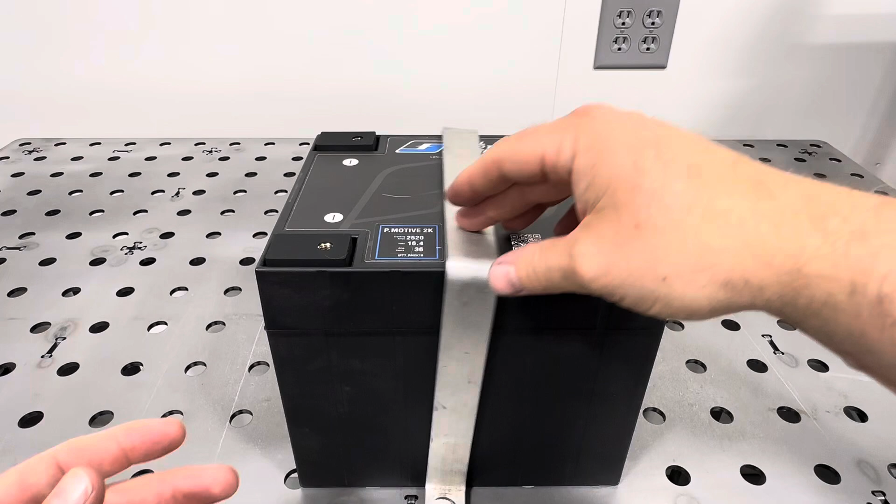And it went over a regular battery. It wasn't this battery, but it's almost like, I don't know if they ran out of time or they ran out of talent or what happened, but this is what was on it. And it's not great. As you can see, it's not really constraining the battery the best. It kind of holds it down-ish, I guess you could say, but we are going to make it better.

We're going to try something different. We're not going to reinvent the wheel, but we do want to get this securely mounted. And this is a lightweight battery, an expensive lightweight battery. We don't want some 5-pound hunk holding down a 15-pound battery. It's just not required, it's just not necessary. It's too much. Nobody wants to spend all this money on a nice, good performing battery and then throw a bunch of extra weight on it when you've spent the money to save some weight.

So we'll try and make it as slim as possible and have some extra features on it that we think will make people's lives easier. And if it goes well, we'll go ahead and sell it.

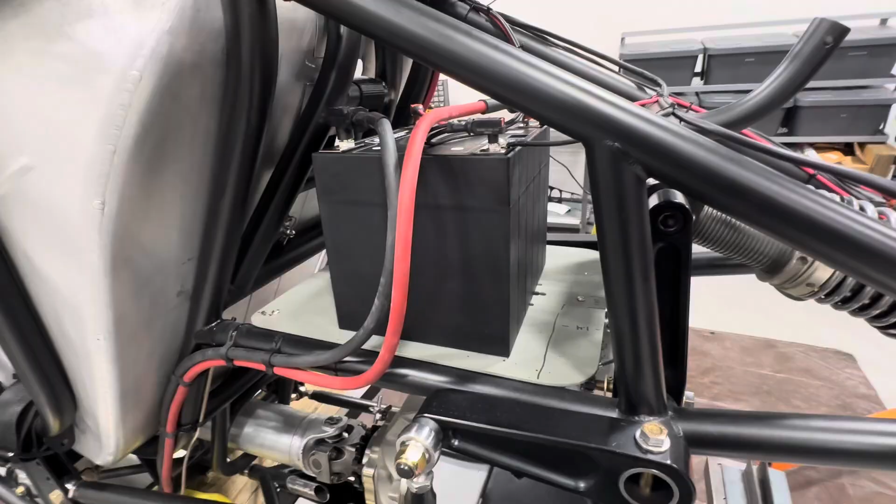Here's the setup we were talking about, and this is after we wired it in. You can see that this is sitting behind the seat and above the rear end. So it's got a cantilever shock system, right in front of the shocks. So we have this much room to work with.

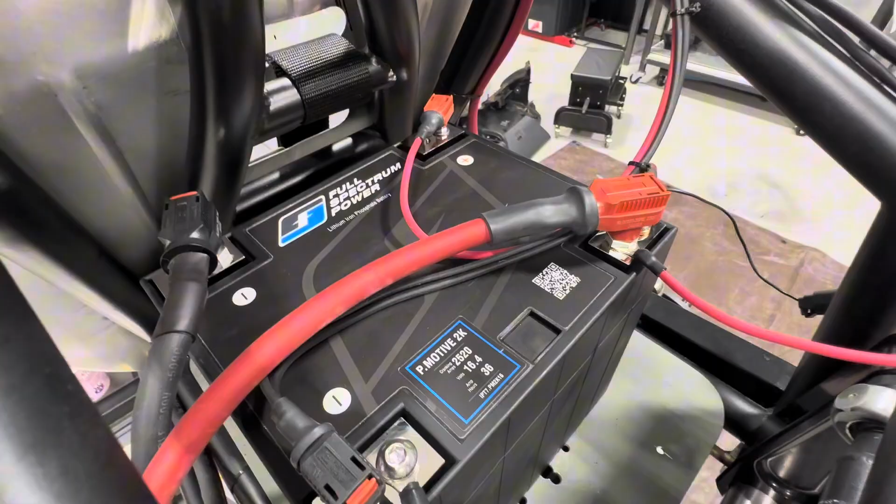It fits, but we have it in here wired up. Of course, nothing's really tied up or tidy. You can see the battery cables going down to the starter, hooked up with Radloks. Check out that video we've got on the details of the Radloks. Those are two gauge wires here, cables.

And then this is some grounds for the ECU, power for the ECU. And then we have a couple other little things for a charger lug that's hooked up to the back. So a charging port is right there.

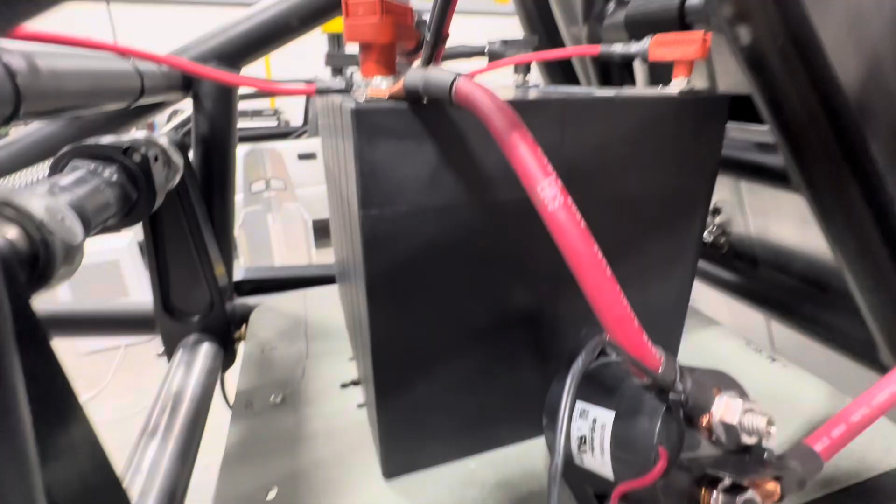One thing that we've got going on is a contactor for the disconnect, and it's just kind of floating right there. One of the requirements I want is to be able to have some method to mount the contactor on the side of the battery mount in order to give it a place to land. So we have space for that over on the side, even if it's sticking out.

And then this will feed up to the relay panel. Thing I'd like to have on the battery mount is to have some sort of details on there to fasten down cabling. I'm not really sure what that looks like at the moment, but I'd like to add some features to it to hold down cabling once things are in place.

All right, so now that we've got the battery in the location where we want it, we have it rough wired in. We've got the cables going where we want them. It's time to define exactly how we want this to be. A couple of requirements: we want it to be lightweight, we want it to be minimalist.

One thing that's been on my mind is, is there really a need to have a full plate on the bottom? If it's elevated slightly and it's captured on the corners, is that enough? I'm thinking so. I'm going to explore that option, see what I can come up with.

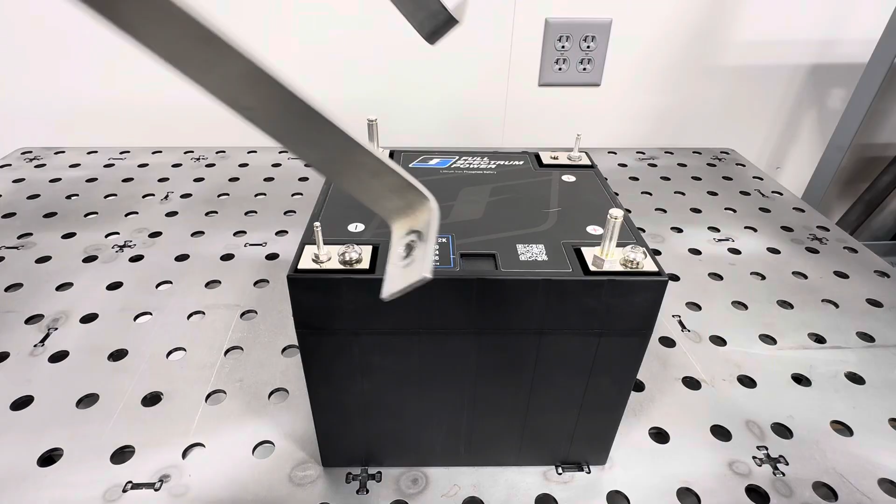It's got to not be this. We talked about this early on, about restraining something, about 6 degrees of freedom, meaning we want something fixed so it doesn't move back and forth, left or right, up or down, or twist in any form or fashion in 3 axes. So you've got 6 ways you need to make sure this is pinned down. Most do a very good job at that.

Some are a little bit heavier than I would like. Again, this is a lightweight battery, an expensive battery. We don't want to have it any heavier than possible, so keep it minimalist.

The other thing we talked about is having some way to manage the cables, whether that be having a place to zip tie them, hold them off, whatever. Just something a little better than what we normally see on a battery hold down.

And I think we can come up with something that will be a little better than what's out there right now on the market. We do have the CAD for this case. We'll start by putting that in and just start building some pieces and see if we can come up with something decent.

Okay, we were lucky enough to get the CAD model here for the 2K case. That definitely helps us out in our design work so we have an accurate model to work with.

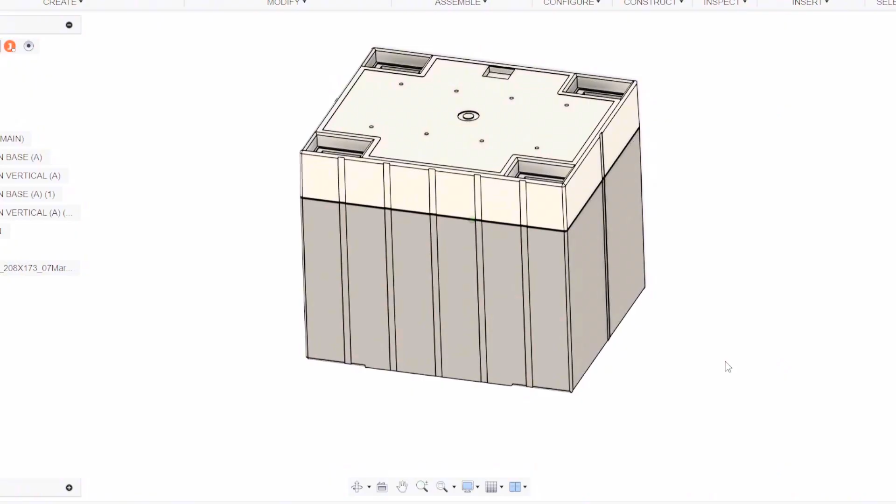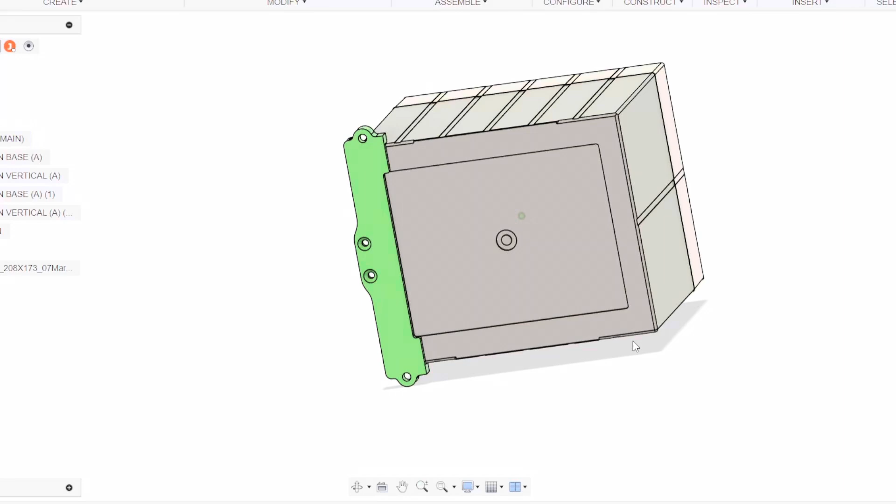One thing I want to point out about this case is that the perimeter sticks up more than the center. So if there was a full plate on the bottom, really only the perimeter would be touching. So I thought, well, if we're going to split the base and have two different portions, then we can just seat it up here, and you can notice it just follows that high spot around the perimeter of the case. So we did give it some thickness here.

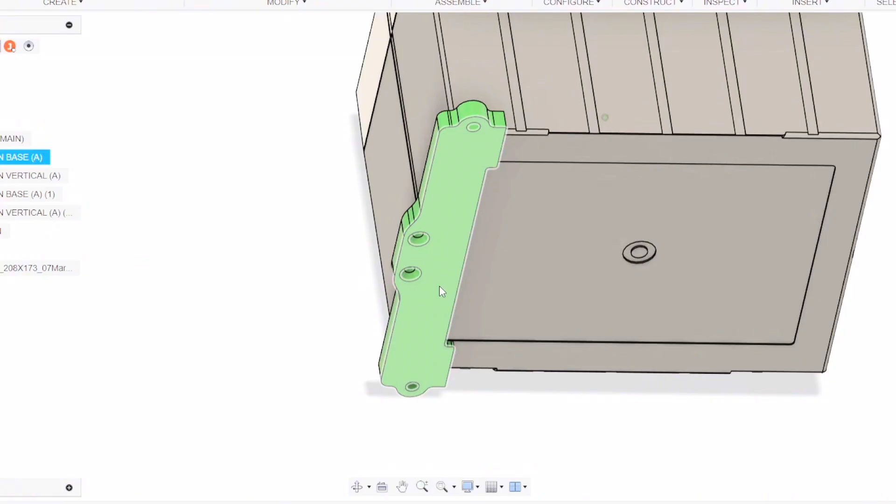You can see how the case sits down inside of a pocket on the corner, kind of capturing the corner, keeping it from moving left or right, forward or back. And we gave it some depth because on the bottom it's going to have to sit flush, so there's a countersink screw there. Of course, if you had a regular bolt there, it would be sitting up on the bolt. So we gave it some thickness for two reasons: for both the countersink and to capture the corners.

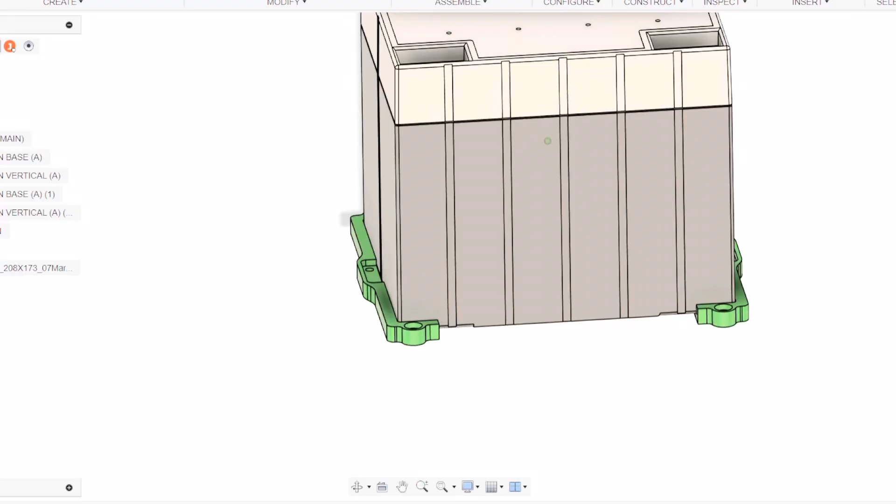And then we'll have four places to bolt it down. Of course, it'll look just like a mirrored image on the other side. Okay, so once that gets bolted down and assembled, you have four points to mount from.

One thing I was going to mention was that we do have a pretty tight corner here, meaning that the case does have a radius on it, but that's pretty tight. So when you're machining something, your tool is obviously round, so you have to use a really small diameter to get in there and pocket that out. Talked to John about that. He works magic, so he'll be able to get that machined out.

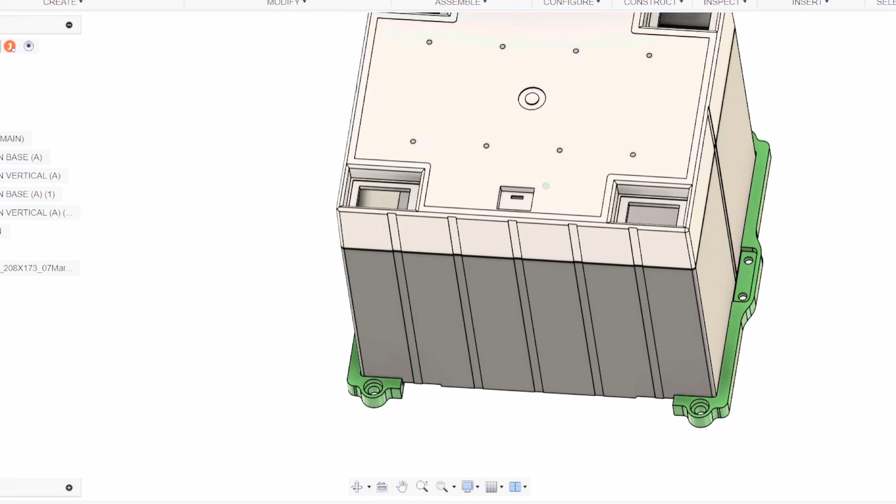And then, of course, to be able to mount it, we went ahead and put a vertical portion on it, and that'll be on both sides. So this spacing here is going to be the same spacing that we put on the top. We did pocket this out some. And then, of course, the bolt down on top.

So we have the holes here on the side and on the top, and that's going to be what allows us to fasten some cable management down. So we kept it very simple.

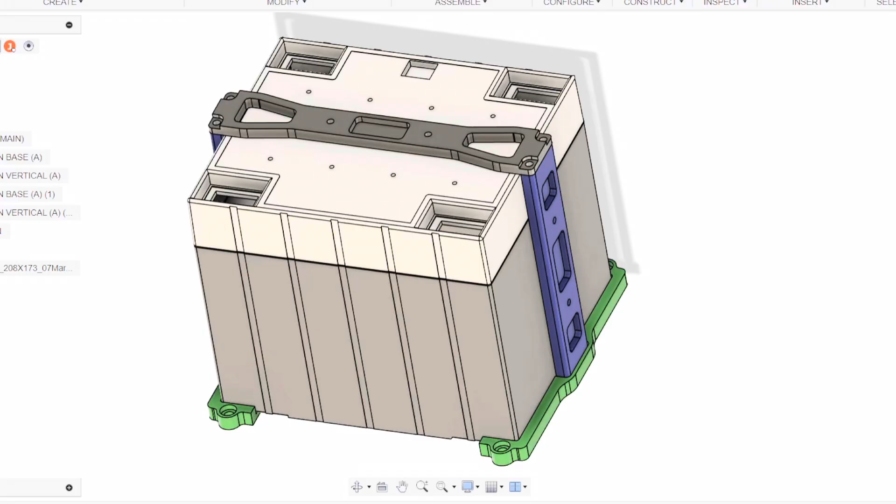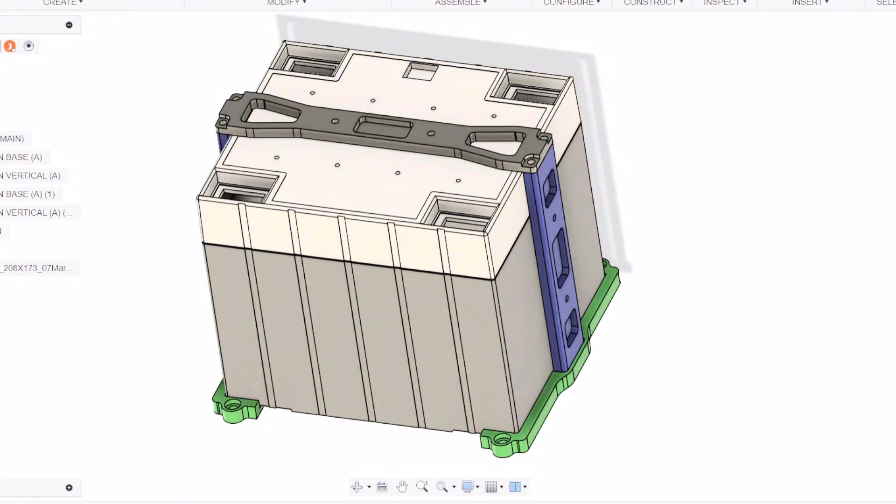Thought about a couple things, adding them in, but because this is a very generic battery, meaning that you can use it in any application, it's not just for a certain type of car that will always be wired the same way. This allowed us to keep it simple and give a few options for things to bolt down, and then we'll go ahead and design some things for cable management that can fasten to those.

My thought has always been to make it as simple as possible in the design. Work is not done until it's as simple as possible, but yet still works. So I didn't want to constrain the use of the mount to just certain applications, but keep it more generic and flexible for the thousands of different applications that this exact battery will go into.

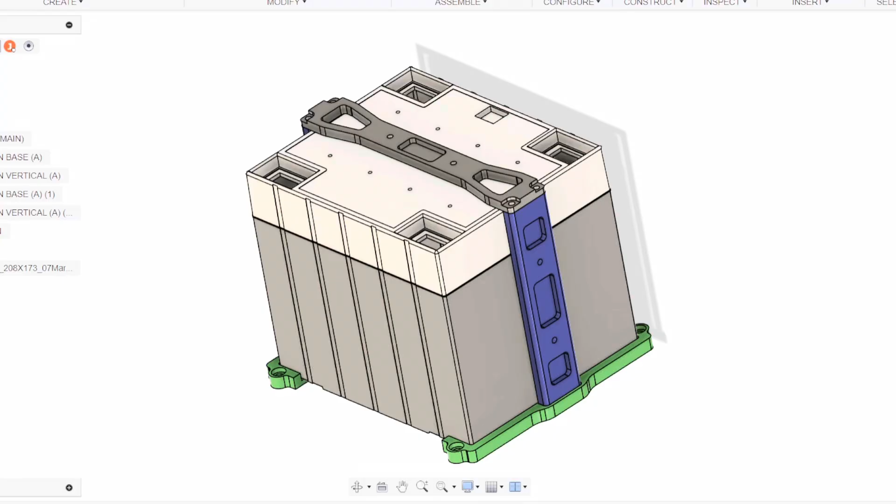Overall, I would say that this should work out pretty well. I think it's time to go ahead and 3D print it and assemble it onto the battery and see how it fits.

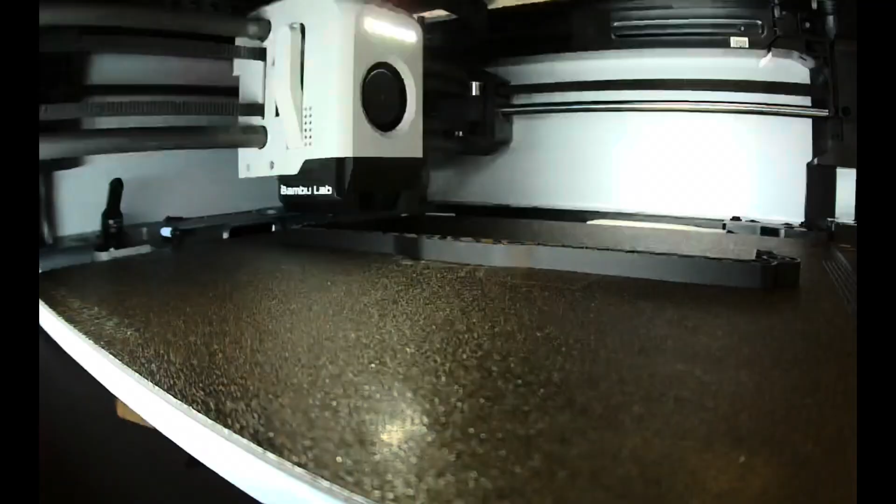All right, these parts are 3D printed. They've got some carbon infused in them, so somewhat strong, but of course we will machine these out of aluminum when we have our design sorted out completely. So it's a 5-piece design. We've got the two base pieces that should capture the bottom verticals and the top tie down. So let's go ahead and put this together.

Seems to fit pretty good. This print seems to be pretty accurate and fits pretty good. We have pockets in here.

And like we said, we wanted to be able to bolt this to the side of it. So the spacing on these is the same as these bolt holes, and most of them on the market have that same spacing. So we're able to screw that in directly on the side. And then we're on the top. There's some common hold downs out there that we'll probably use.

Let me grab one of those and put that on. Something like these, you can find these out there just about anywhere. Just a cable tie mount, and we'll tighten that down with a 10-24, and that'll allow us to zip tie some things up. Once the hold down assembly is put together and assembled onto the battery, then we can go ahead and pin it down.

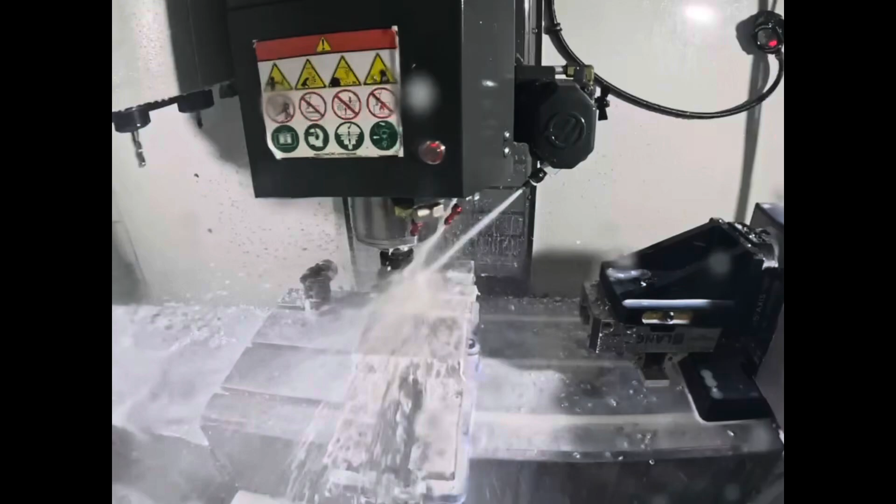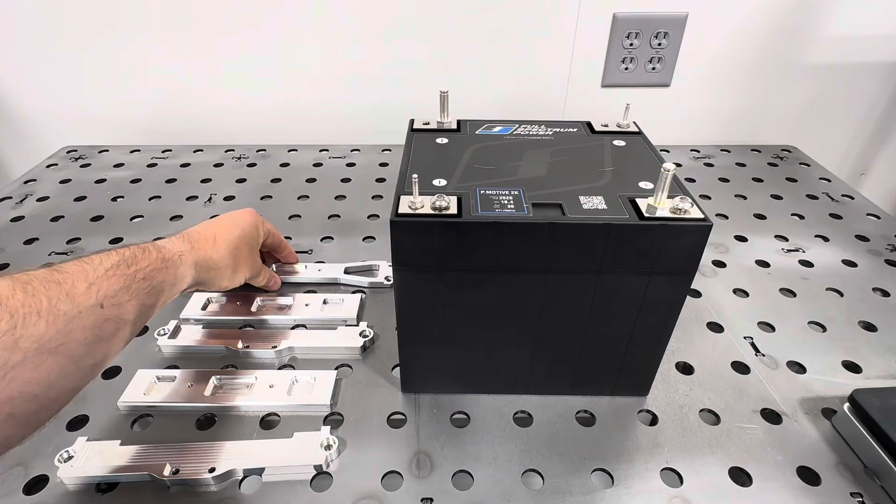All right, parts are machined, turned out great. Got two of the base piece, then two of the vertical riser, and then the top clamp down. One thing I wanted, as I noted before, is I wanted to be around a pound or less. So I guess it's time to see how well we did. I thought it'd be pretty close. You can get an estimate from your CAD, but you never really know until it's off the machine. So there.

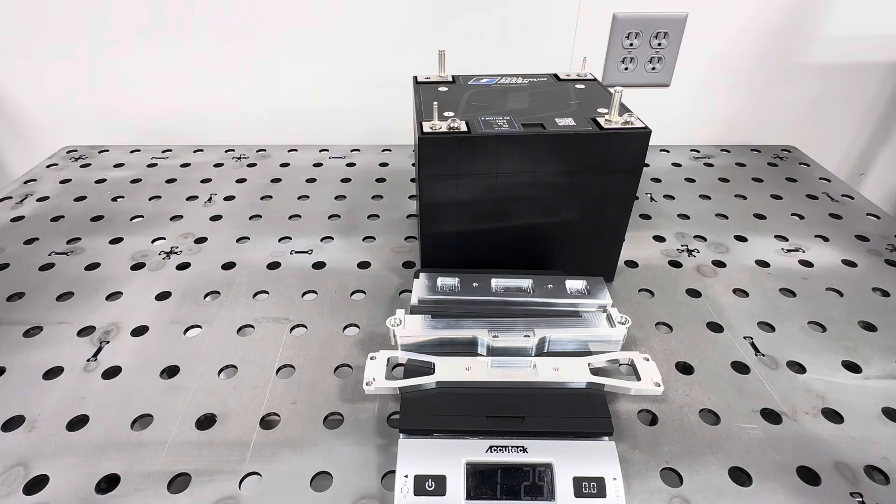All right, looks like we are a couple ounces heavy here. Plus there'll be a few fasteners, so may have to put this on a little bit of a diet for the final revision. Possibly pocket out these holes completely, do a few things. I have a few ideas where we can make it a little bit lighter, but not too bad. Really close to target, and we will have a few fasteners as well, so that will increase that. But not too bad. We're close and good enough to proceed and see how well it works and put it into practice.

All right, this seemed to have gone together pretty good. This is the point where we find out how rigid it's going to be with the 3D print. It was pretty flexible, at least the way I printed it, so this will tell us how rigid it's going to be, how well it's going to hold the battery down. Everything seems to fit in, the corner's good.

That's kind of a tight radius, so I was worried about that, but it seems to have come out really well. That's part of the reason I do like using the transfer punch when it's all assembled, because there could be some slight variances in exactly how this gets bolted together, but it really isn't that much. So the template works just fine as well.

But yeah, it's feeling pretty good. Battery doesn't seem to want to move as far as inside of that, it doesn't want to flex out. Especially once it's bolted down, it's definitely not going to go anywhere. I'm sure you can flex this out if you really try, but once it's bolted down, that essentially gives you a fixed platform, keeps it from moving left and right, up and down, wanting to twist or anything. So I think we're good as far as rigidity on the hold down.

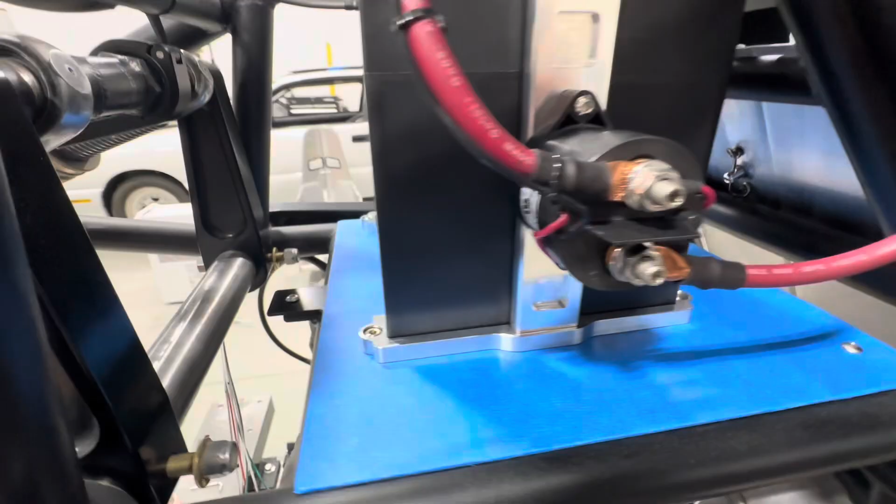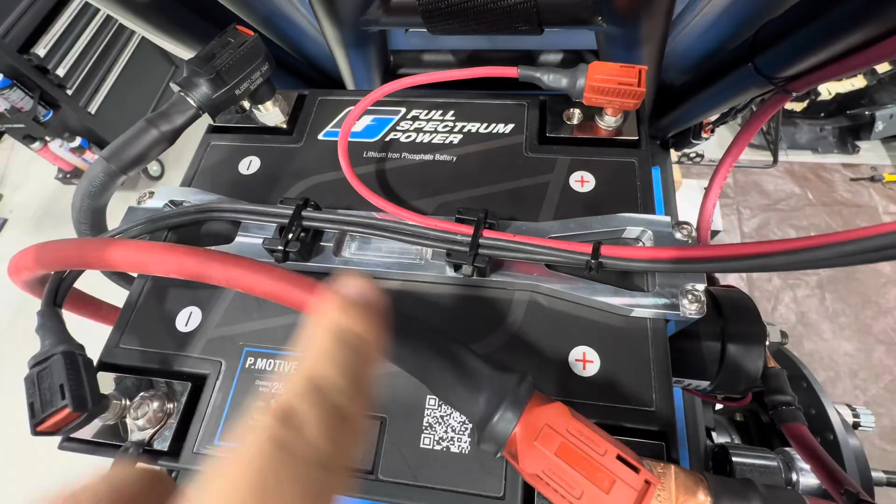You can see it's bolted down at the base there, 1/4 inch bolts, and then we've got the contactor wired up, mounted directly to the vertical post on the mount. Just simply put the two 10-24 screws in and you're ready to go. Coming up to the top here, these two holes, which is actually the same bolt spacing as the other one, so you can put the contactor on top if you want, but we just screwed down two of the simple cable tie downs and put zip ties around them. Holds it in place, gives you a nice place to feed through.

Over here, as you can see, these cables are still floating out there. I'm not super happy with that, but I do have these two holes here. So I made something.

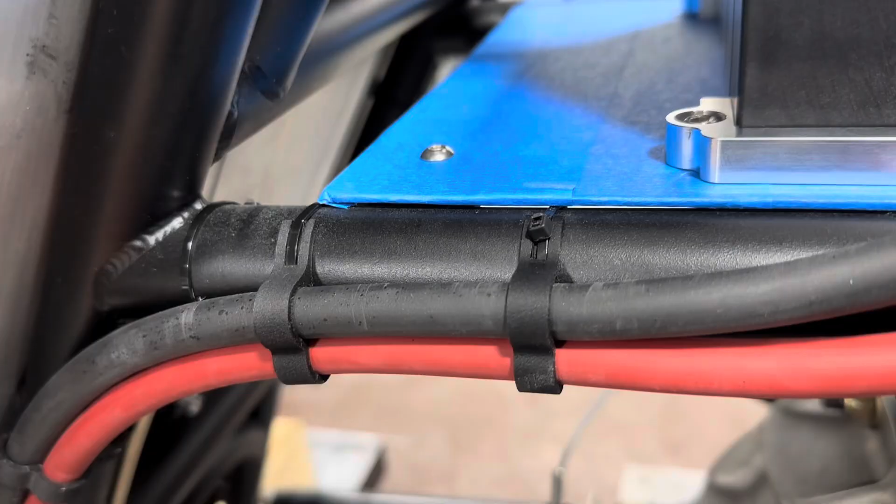I'll show you how I did that here in a second. Notice how we have these cable ties for round tubes that we made. I like this because oftentimes if you wrap a zip tie all the way around, you kind of have these gaps down in the corners. This is actually sized to the cable, and then a zip tie goes underneath the cable and stays around the tube, keeping the zip tie in a round fashion instead of going all the way over the cables, and it captures it right here.

So this is something we've been using a lot, these cable tie downs for capturing. These little widgets we've been using a lot for round tube. Makes life easy just with zip ties to put it on, but yet works a little better in my opinion.

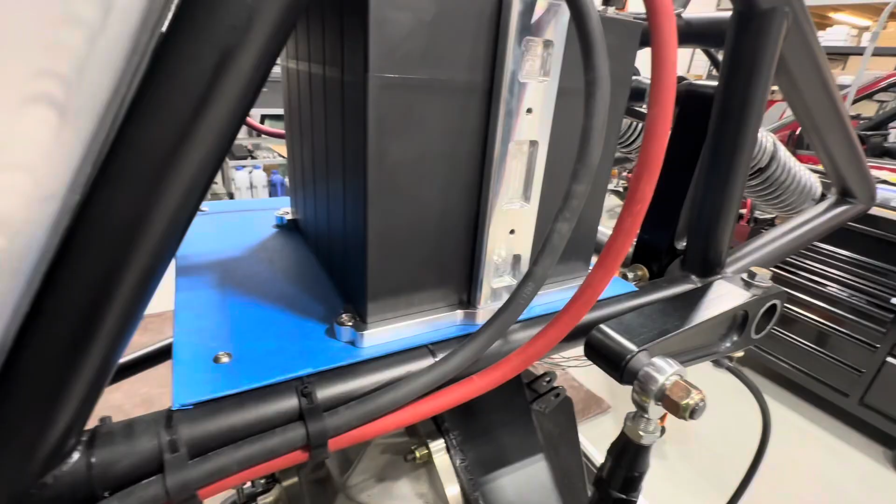I made something similar for the battery mount. Notice it stands off a ways. So we took a couple measurements and allowed this to come off further. We'll show you that.

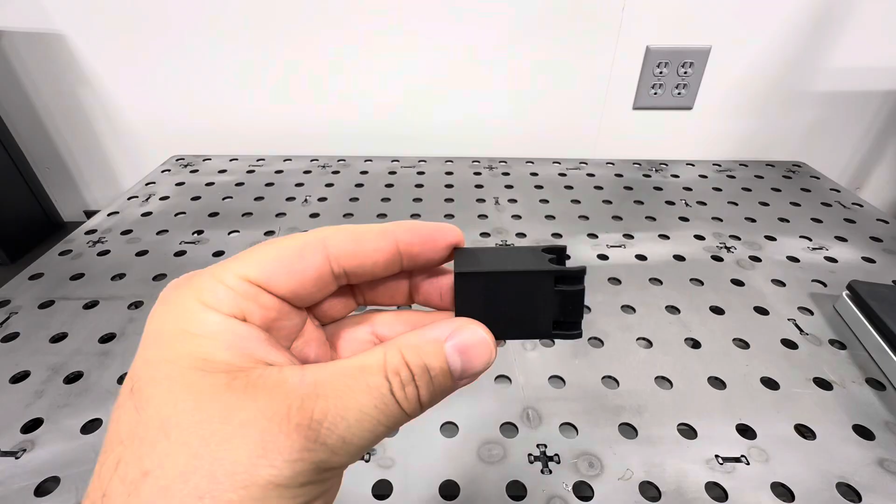We'll use this to tie off those 2-gauge cables. Notice this is relatively long, but that's how long it needed to be to space out to where that frame rail is. And notice it has a through hole, so you just slide that screw through. You can screw it into the battery hold down, and then the cables go in.

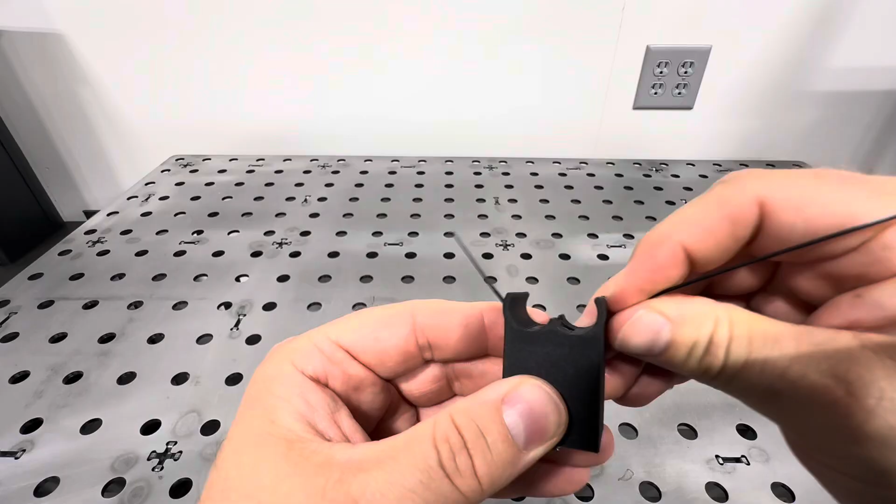What we like about these is that the zip tie goes through there. We've got actually 2 of them on there in this case, so you slide these through. Again, this is 3D printed. Probably not something you're going to machine, a feature like that inside of here, at least not in this fashion. So yeah, there you go.

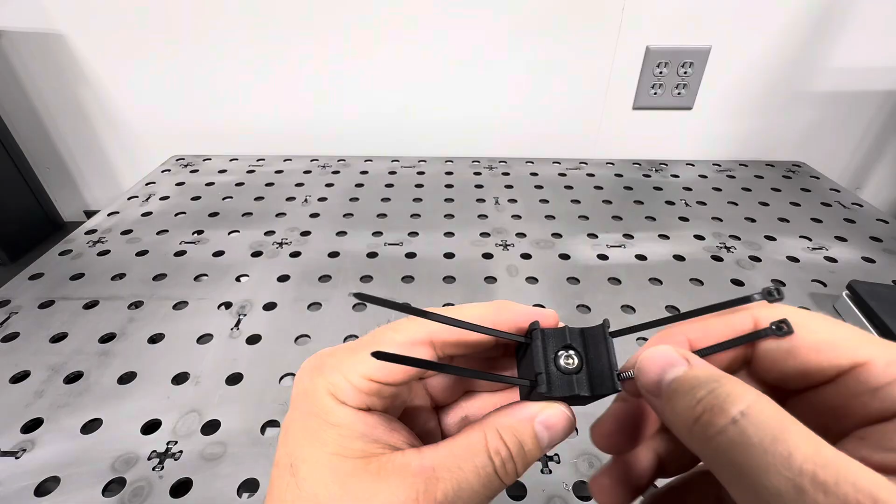We'll have a couple of these on there, and the battery cables will go through. We'll zip tie them down, and that should give us a tidy method to control those cables.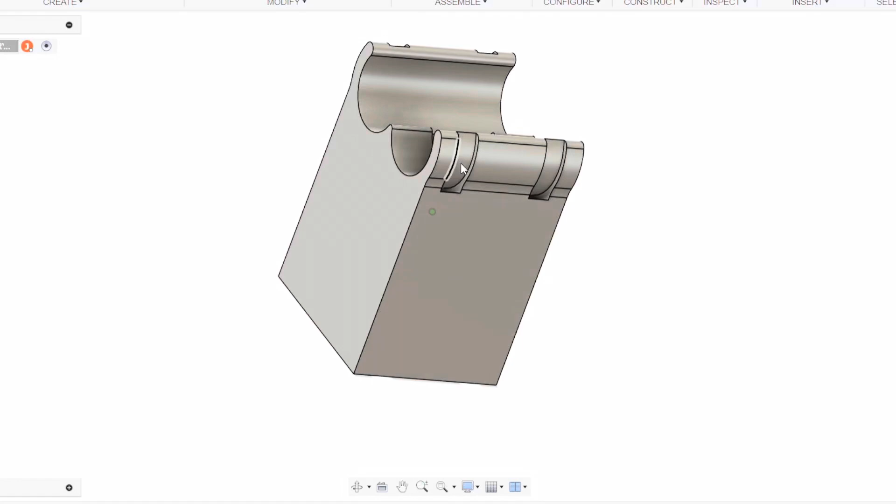Here's the model of that hold down for the 2-gauge cables. You can see it's got the through hole to screw it down, and it has 2 sections here to put the zip ties around. Sectioning that out, you can see that the zip tie just feeds all the way underneath. And that's all there is to it.

Here's a short version of that same thing that we used to stand off. Just wanted to show that. That would keep the cables nice and tight to the battery mount.

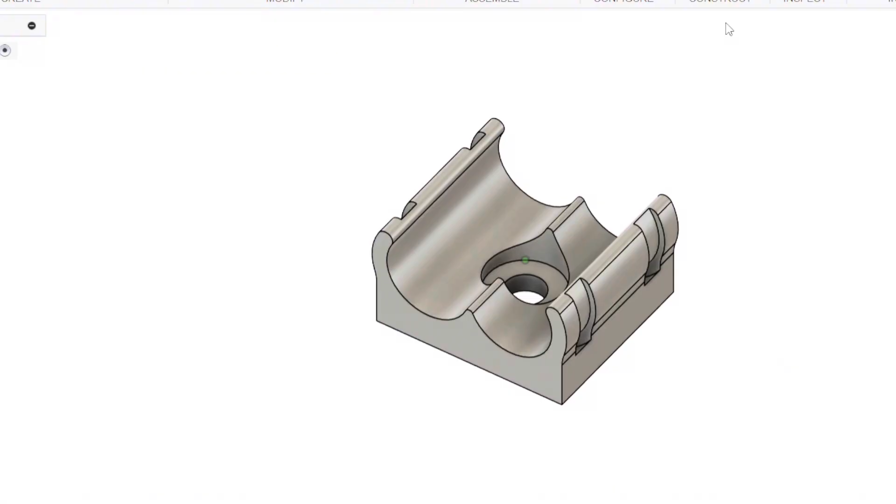Here's another option that would clamp them together but yet separate. Just a different way of accomplishing the same task, but they are going to be separate because you have the screw going through the center, so they won't be right next to each other.

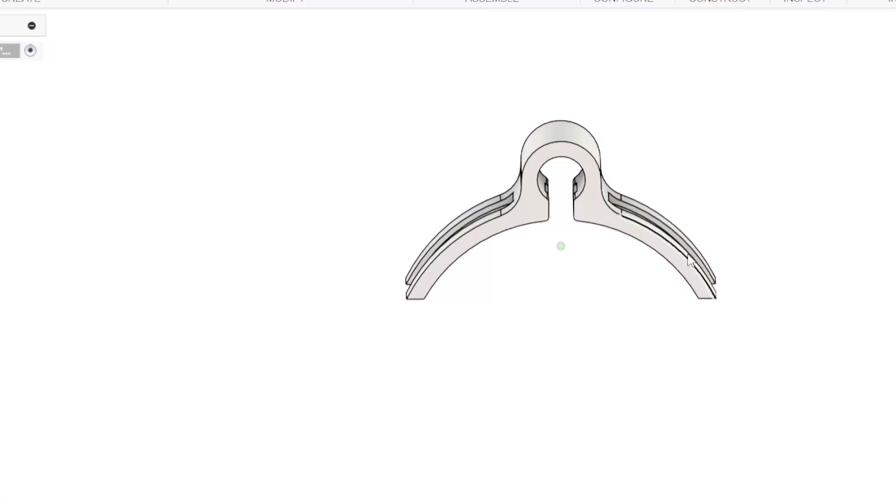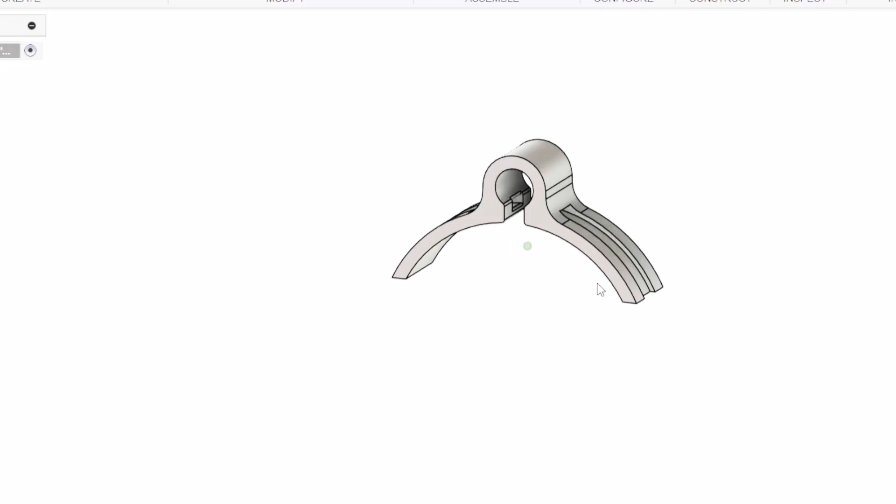Here is a brake line mount to the 2. This is off topic, but we were showing the cables mounted to the side. These are both the same type of thing. You can see how the zip tie will go through and underneath the cables, cross over and wrap around the tube. And it's the same principle with this single brake line. You could do that too. Anyways, just some ways to help manage cables, tubes, hoses, that sort of thing, that anybody can really set up something like this and print on their 3D printer.

That's what we did, and it works out great. Just use the right materials and whatnot to hold up to the application. Just wanted to show a few different things for cable management or hoses or brake lines.

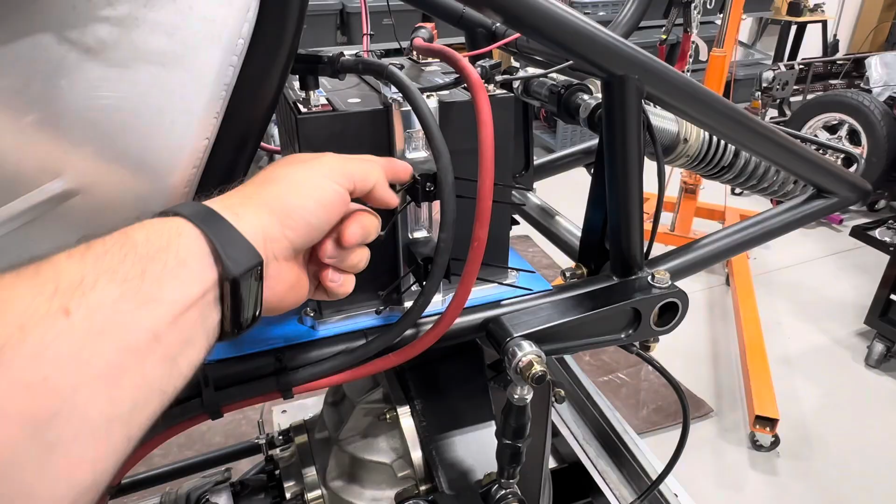So we've just screwed those parts into the side, and hopefully these will help take these unruly cables and get them straightened out a little bit. So we'll just push these into place. Should be pretty snug if everything is correct here. Yeah, it's almost like staying there without the zip ties just because of how snug it is, but there we go.

And I'm thinking maybe I'll just put these on the website so that people can download these. I mean, anybody could just design something similar depending on what size their cables are, just a million different options. So this would give people something to start with as far as a CAD model if they wanted to make something. Of course, everybody's application is going to be a little different, but...

Should work out pretty good. That just makes everything look a little more kosher. Trim those zip ties, and that should be good. You can see it from there. Just kind of helps make everything a little more smooth.

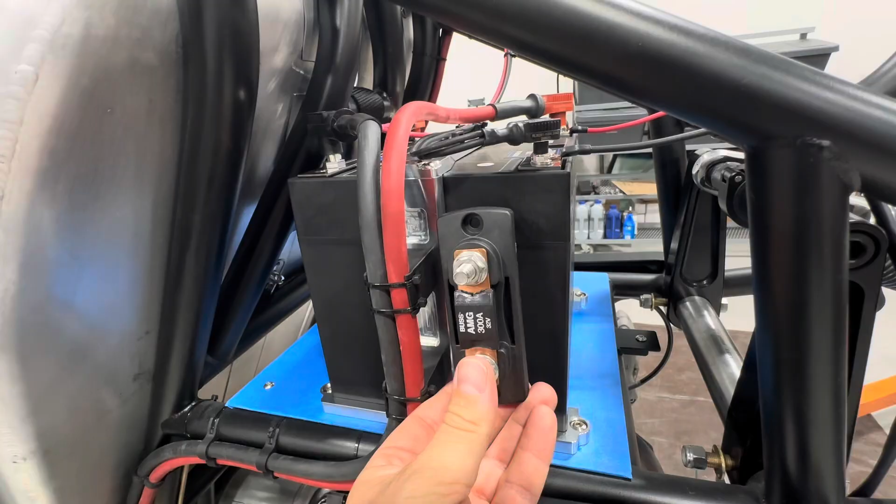You can match up the radius of your starter cable and ground, slipping them through that cable retainer. If those were removed, you could use these two holes with a simple plate, made of carbon fiber or aluminum. If you wanted a mega fuse mounted there, you could bolt it to the plate and run your cable through the fuse. It gives you options for a simple plate bolted there, just two screw holes, nothing overly complicated, but it really does give you a lot of different options for cable management around your battery.

So I think at this point, it's probably time to get these parts anodized and finish this project up.

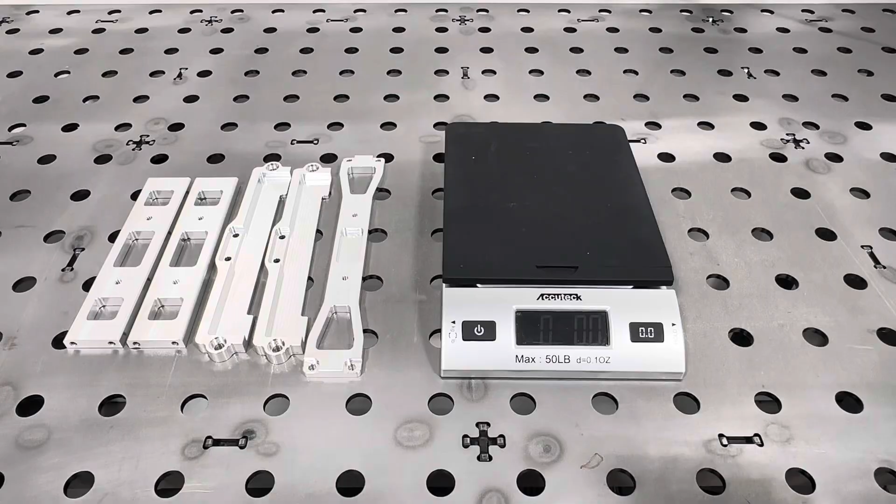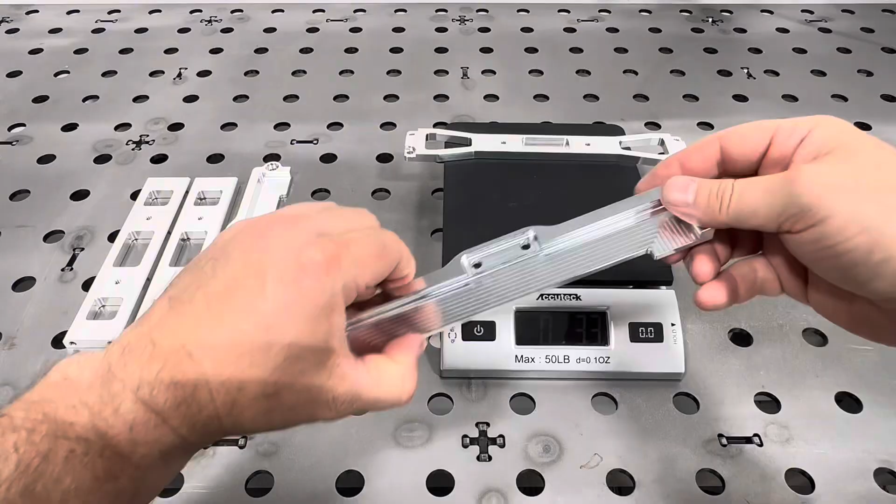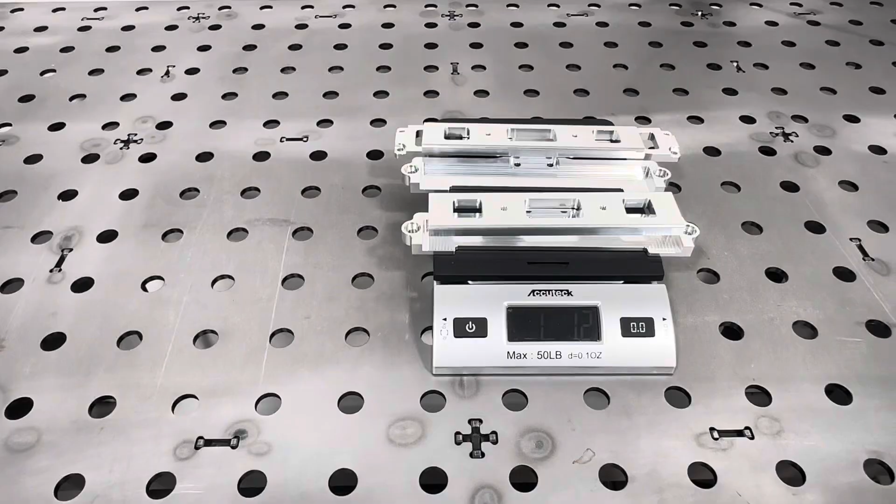Wanted to give a quick update. This is after the fact, but I want to insert this. We made a slight change in the design, turning the pockets in the risers into through holes to take a little mass out. We were at 1 pound 2.9 ounces before, and now we're at 1 pound 1.2 ounces, so we took out close to 2 ounces. Adding the fasteners, let's just call the weight 1 pound 2 ounces. We're going to stick with this, and it got us pretty close to our target.

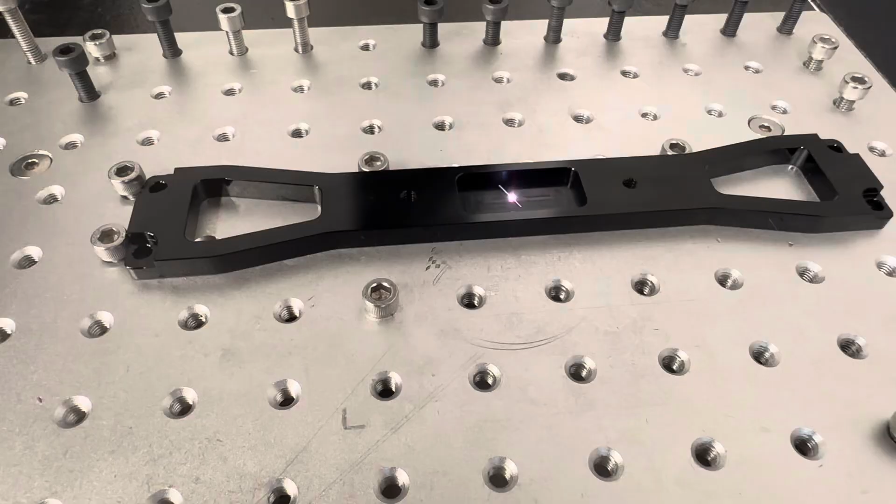We are back from the anodizing process and gave it a little Maven logo. I gotta say, it actually turned out pretty good. We do quite a bit of work on the aluminum before it heads out for anodizing, so it has a shiny look to it and whatnot. But definitely happy with how it looks.

A few little tweaks for the next production run, but I think we're in good shape. I think people will like it. I think we'll provide a couple of these with each one, so people have something to tie down. And again, people can make whatever they want, there are so many 3D printers out there now, it seems like everybody's got one.

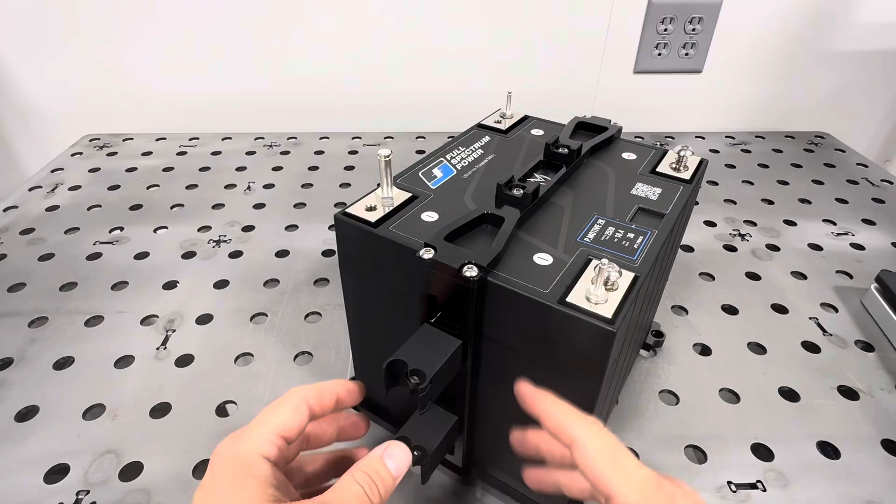Simply just make it to bolt down to the 1/4-20 hole, and again, like we were talking, you could literally just screw a plate here if you need to add a bunch of accessories or pin some things down. Otherwise, it just gives you a lot of flexibility.

Again, we didn't cure cancer, we didn't really reinvent the wheel, but we added a few things that I think will help people out, make life a little easier when they're wiring it up.

Again, we have these quarter-20 holes on the outside, so if you want to mount the whole battery in, you can literally just unbolt these holes and take the whole entire thing out. Or in a standard fashion, you can just take these out. Sometimes the main fasteners are underneath the battery, but in this case they're not, so you can take the whole thing.

In the application we've got here, it's a bit tight, and it's actually probably easier to take these bottom bolts out and slide it out. So just depending on what your application is, you have both options either way.

So yeah, I think I'm pretty happy with how it looks, how it functions, and we'll go ahead and slap this thing back into the car and finish it up.

All back together with the anodized battery hold down. The hold down plate here is black powder coated. Shout out to Stevie at TSR, got that knocked out for us.

Here you can see how we trim the terminal caps, the red and black rubber caps, to work with the different Radloks and cables we have bolted to it. Pretty easy to trim, I used a round punch to open up some of them, and then did some trimming with a utility knife. Works out great.

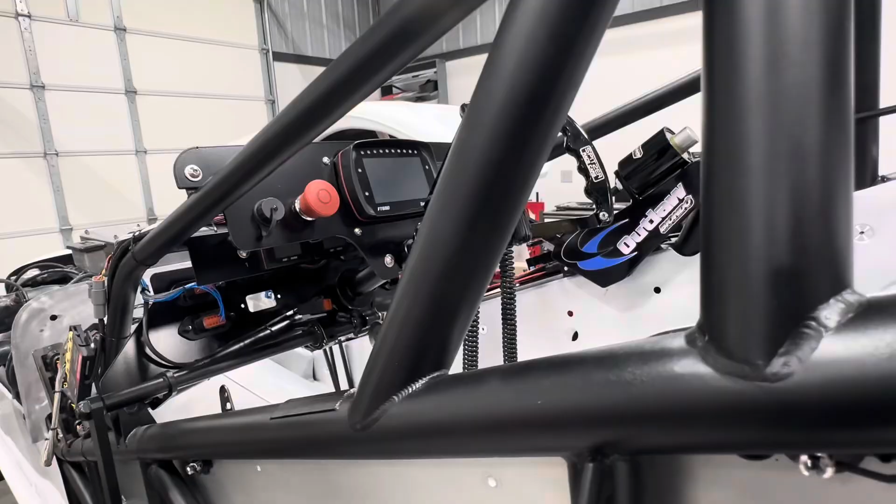FT600 on board, a good quality power source to feed the electrical needs. And again, thanks for watching.